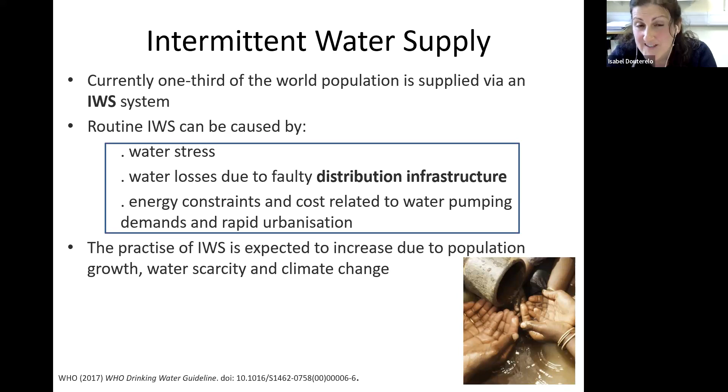And the practice of intermittent water supply is expected to increase in the future because we have a population everywhere growing. We have less water, and we need to take into account the effect of climate change on the supply of drinking water. So it is expected that in the future, we will see more systems managed as intermittent water supply systems.

I'm going to talk about drinking water distribution systems because I think sometimes they are forgotten. Most of the efforts are at treatment level, how to treat the water. And there is sometimes an assumption that the water is going to be okay when it reaches the customer's taps. But that's not the case. After leaving the treatment, the water travels through all these pipes, which are kilometers and kilometers of pipes made of different materials. And we have all sorts of microorganisms, as you can see in this picture, that like to live in these drinking water distribution systems.

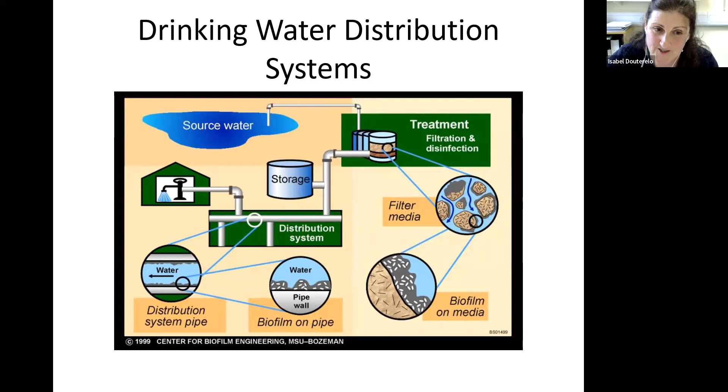And they don't like to live in the water. They prefer to live, as you can see in the picture, attached to the inner pipe surfaces, forming biofilms. And most of the research I'm going to talk about today is about how these biofilms can affect the water quality in intermittent water supply systems. As I said, everybody is analyzing water samples and looking for pathogens in water samples that come out of our taps. But most of these microbes, unfortunately, live attached to the infrastructure, to the pipe surfaces.

I'm an environmental scientist and a microbiologist, and for me, these distribution networks are fascinating ecosystems because they are oligotrophic. Oligotrophic means that there are almost no nutrients for these microbes to survive. Here in the UK, at least, we also have a chlorine residual in the pipes to keep these microorganisms under control, but they don't care. We are going to find beautiful formations of microbial biofilms in these drinking water networks, creating all sorts of problems.

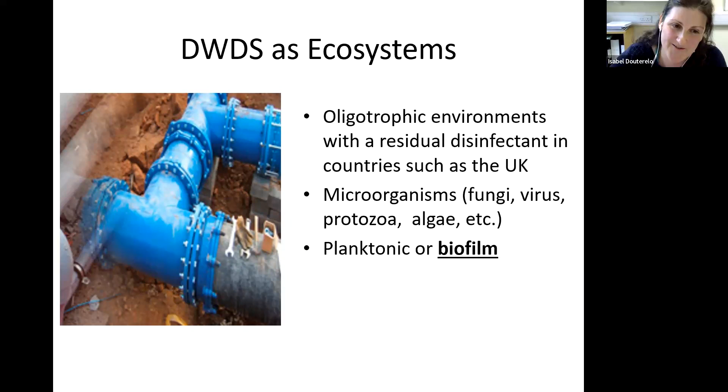And in Sheffield, we've been looking at these microbes for a long time, and we found all sorts of organisms living there, from fungi, viruses, protozoa, algae, and I can keep enumerating all the types of microbes that we found. So it's a big problem having these biofilms in the water infrastructure, living in our distribution networks.

Just briefly, because I'm not sure if all of you know what a biofilm is or what kind of problems these biofilms can give in distribution networks. A biofilm basically is microorganisms that attach to surfaces. They also attach to each other. They love to form these kinds of communities, and they are protected against environmental changes, let's say, through what we call EPS, an extracellular polymeric matrix, okay?

And if you are a microorganism living in a biofilm, it's fantastic, it's perfect, you are protected against different external agents and changes in your environment. But the problem is for water companies or governments around the world, because they create all sorts of problems. They can be reservoirs of pathogens, and they are also reservoirs of antimicrobial resistance. There is a lot of research about how biofilms in pipes are reservoirs of antibiotic resistant microorganisms, and that is a huge public health problem.

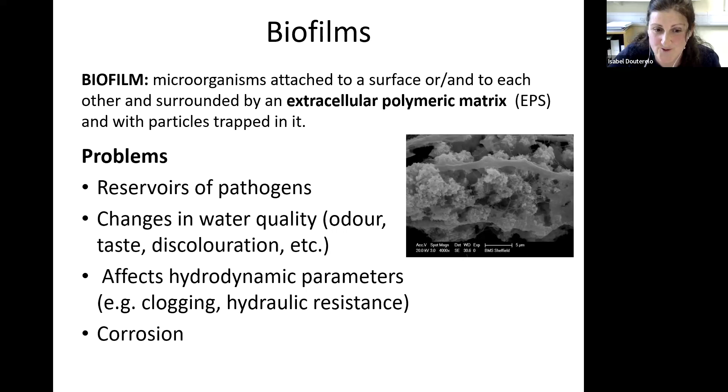They can also promote changes in water quality, from odor, changes in taste, discoloration, which in some countries might not be important, but in the UK, the water companies invest a lot of money in solving discoloration problems. And they can also affect the hydrodynamics inside the pipes, and it is well known. The last problem is some microorganisms can corrode materials such as iron in distribution networks. So taking into account all these problems, we try to avoid, or we want to control, the formation of biofilms in networks.

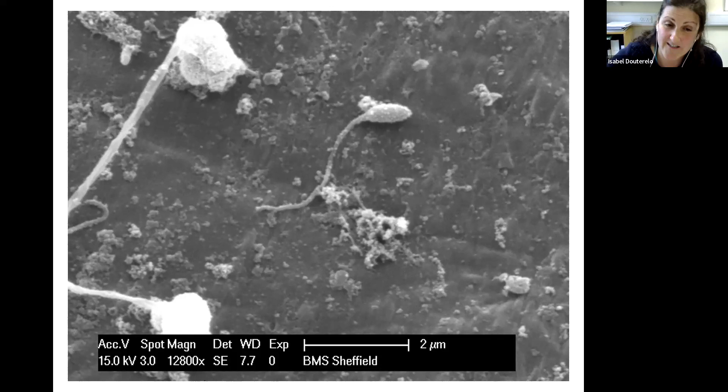These are just a few pictures showing you how the biofilms form. I show these pictures a lot to water companies because sometimes they don't believe me that they have all of these fantastic formations of microorganisms attached to their infrastructure. But basically what happens is you have one of these microorganisms floating in the water. It comes and attaches to the pipe surface and starts to change that surface and starts to produce polysaccharides and change the surface in a way that is attractive for other microorganisms. And as you can see, more and more of them are starting to come, and they start to form this extracellular polymeric matrix, and they grow more and more.

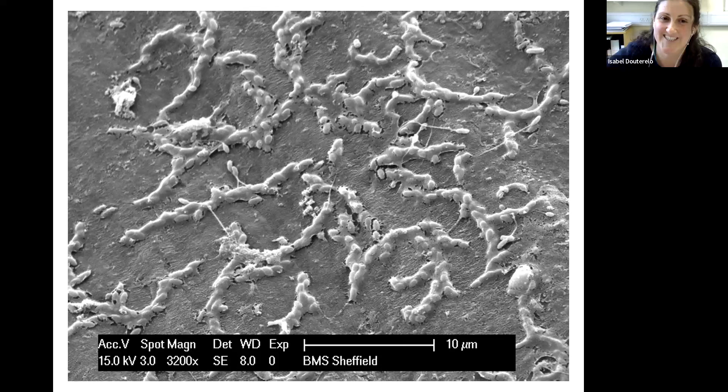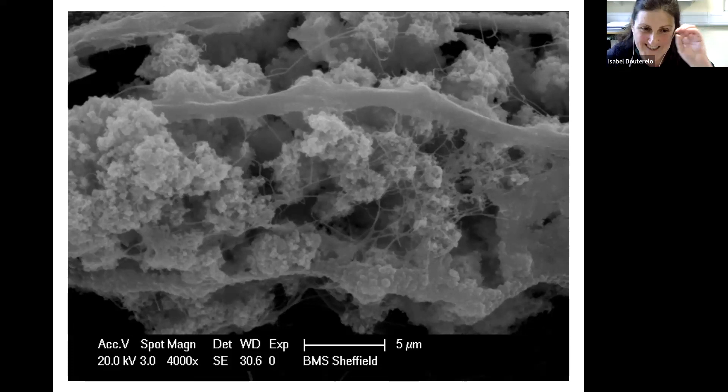And this is a picture of a biofilm that we grew in an experimental facility that we have here in Sheffield, and it's only a 28 days old biofilm, okay? So I always say to the water companies here, if this is what you have in 28 days, imagine what you have in pipes that have been there for years and years. So this was just an introduction to the problem of biofilms in drinking water networks.

In terms of how these biofilms can affect water quality when you have intermittent water supply, it's clear that when there are changes in pressure in the system or changes in flow, we can mobilize these biofilms, okay? So the interruption of supply can really disturb this biofilm, leading to the problems of water quality that I mentioned before, but also pressure losses in the system can favor the intrusion or mobilization of these microorganisms.

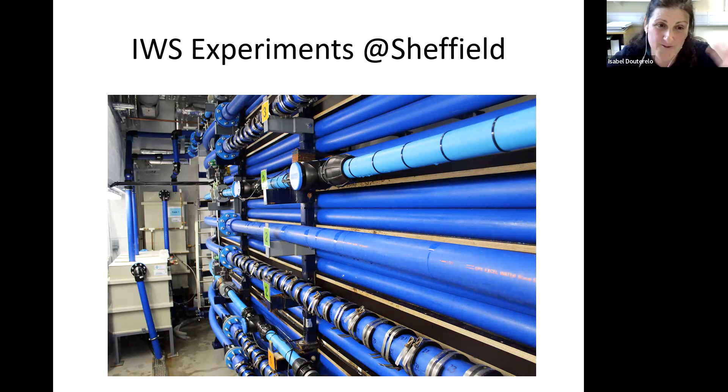And we use Yorkshire Water, okay? We use drinking water from our local supplier to find out what happens with these biofilms that might form in distribution networks. As I said, this is the best picture we have because we tried and it's impossible. The facility is so big that we cannot really show how big it is, but just to give you an idea. And again, more pictures and a bit of the characteristics of this facility that we use to grow biofilms and to study how these biofilms affect the quality of the water, in this case during intermittent water supply events.

So, as I said before, we have 3 independent loops of pipe. This is the internal diameter. The total length is 203 meters. This goes around. We can control the temperature of the water. We can control the flow. And we can also measure turbidity and chlorine constantly. So we can measure these 2 parameters in real time, okay?

But for me, as a microbiologist, the most interesting characteristic of these facilities is the fact that we can put coupons in sections of pipes. You see these kind of metallic holders, okay; in each of them, we can put one of these little coupons that follows the curvature of the pipe. On the top of these little coupons, made of the same material as the facility, we can grow these biofilms, and I can use them to extract DNA and find out what kind of microorganisms I have growing in the biofilms. The inner part of this coupon, okay, we can take out and look at under the microscope. So the pictures I showed you before were just from this little small coupon that goes inside the pipe.

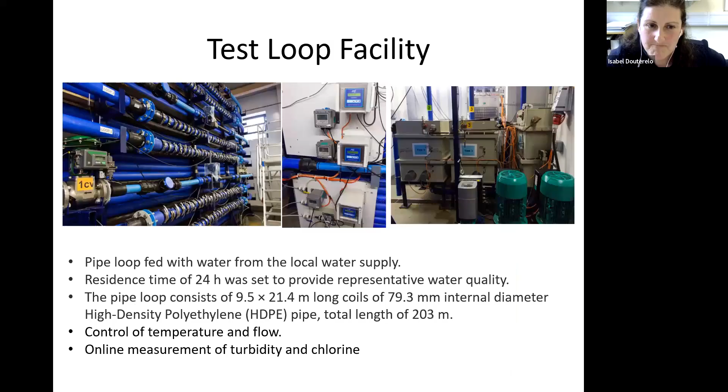Why am I asking this question? Because sometimes we will have the water pressurized, but sometimes not pressurized in the evening. And in the daytime, when people use the water again, we pressurize the water again. So during the evening, just to conserve the water, the water was not pressurized. It's flowing, but the pressure may not be as high as the daytime. So I'm curious, would that encourage or increase the biofilm detachment, or does that actually not do anything to the biofilm?

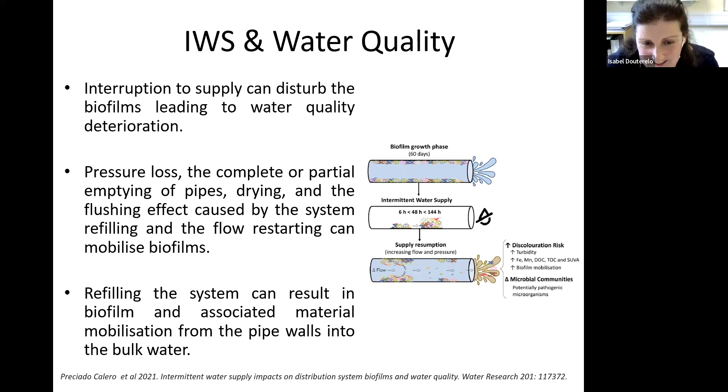Okay, thank you. And next, Abdul, please introduce yourself and ask your question. Hi, good afternoon. This is Abdurrahman Shamim, postdoctoral research fellow at University of Exeter. Thank you for the interesting webinar.

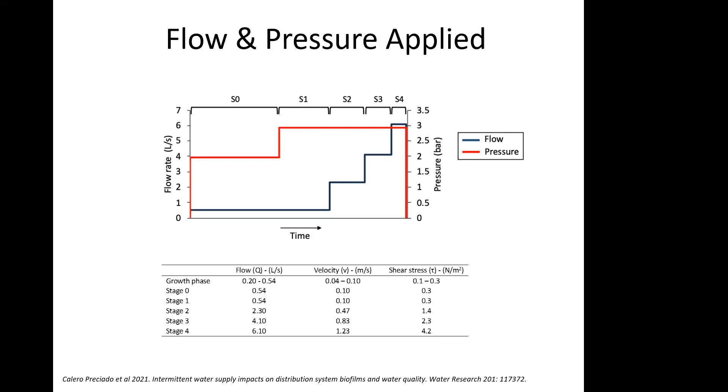It was very informative. Actually, my question was also related to the pressure effect on water quality, as you have concluded that pressure didn't have any effect on turbidity and discoloration. So I was wondering if you have also considered pressure transient events by rapidly opening and closing, and whether or not they have some sort of effect on turbidity, or you have gradually increased and decreased the pressure. It's very unique, because otherwise this could have been expected, because pressure transients really affect water quality degradation. So I was curious if pressure transient events have been considered in the experimental work.

Thank you. So thanks for your question. We only did the step I showed you before. So we didn't play a lot with pressure transients. It was this change in pressure, and that's it.

Other colleagues here at the University of Sheffield play more with pressure transients, but I cannot tell you the results they have. In this experiment, we only increase it here, and that's it. But I know that pressure transients have an effect, because other colleagues here in Sheffield do that kind of research. I was focused more on what the biofilm is going to do here.

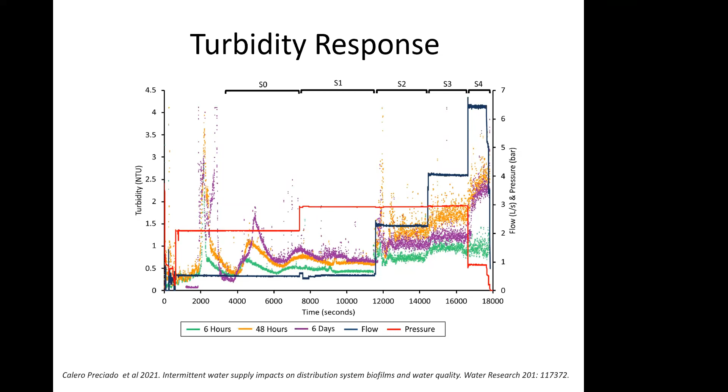Quite interesting, very informative. I would like to touch a little bit upon the practical aspect of your research, and perhaps you can give us some more information on two aspects. If I understood correctly from your presentation, the system was emptied and refilled gradually. Am I right? Yes. It was not in a way shaken, if I can use that word.

No. Now, in practice, for all of us that deal with intermittent water supply, the first thing the operators do is just open the valves completely, and then you've got a gush of water going into the pipes. So, the first question: would that certainly create a problem with the biofilm, irrespective of the duration of the intermittency?

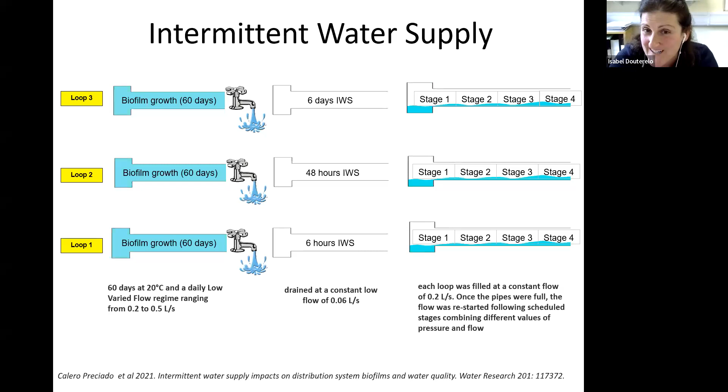Yes, because these biofilms are adapted to grow to the hydraulic conditions that they have in the pipe. So if it's an intermittent water supply that is controlled, that always happens at the same time, they are going to get adapted to it. But when you suddenly change the conditions is when you mobilize. So yes, you are right. In this case, we wanted to have the biofilm there just to do the mobilization experiments. But you are right, as soon as you change the conditions.

Well, so far in practical terms, we've been advising operators to open gently so that the system fills up slowly. But in practice, I don't think it happens. Operators just want to fill up the system as quickly as possible. So that's the first aspect. The second aspect, assuming that we do manage to open the system gradually, so that pressure builds up gradually, we do not have extremely turbulent flows as far as we can.

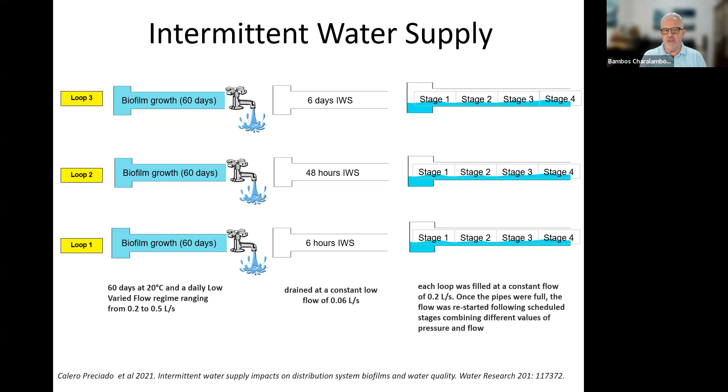What would you say from your experiments would be the optimum intermittency in terms of the biofilm? Because I've seen you checked different durations. What would you say would be the optimum? I can guess, but it would be nice to hear your views.

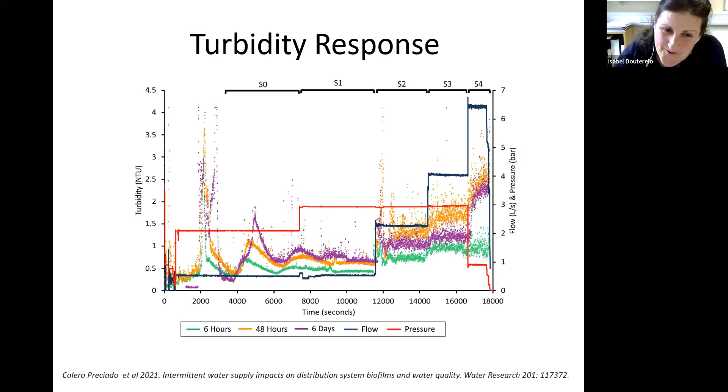So basically, this was a bit like a jigsaw or a puzzle, because when you look at the formation of disinfection by-products, I have the result that 6 hours was bad. So you don't have as much material or pathogens mobilizing that can reach the tap, but then you might have a higher risk of formation of disinfection by-products. So if you don't have chlorine, which in some countries around the world they don't even have, probably this is not going to be a concern, because they are formed from the interaction of organic matter with your chlorine or your disinfectant.

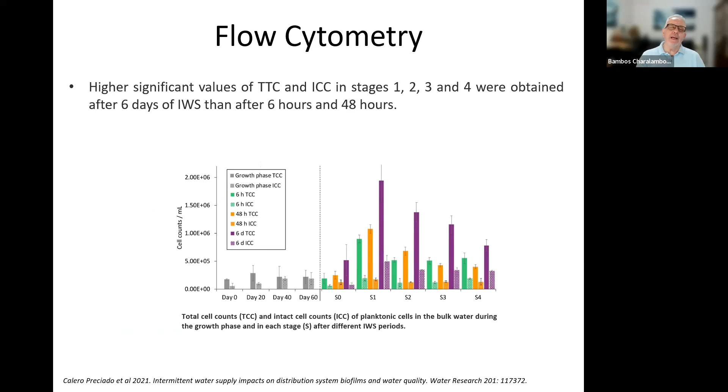So in terms of the amount of pathogens that can reach and really harm people, 6 days was clearly the worst. So the longer you leave it, the higher percentage of these microbes that we don't want to have in the water were mobilized from the biofilm. So yes, the longer the worse. So if we have to have intermittency, then it's best to maintain our duration as reasonably short as possible. Thank you, Isabel.